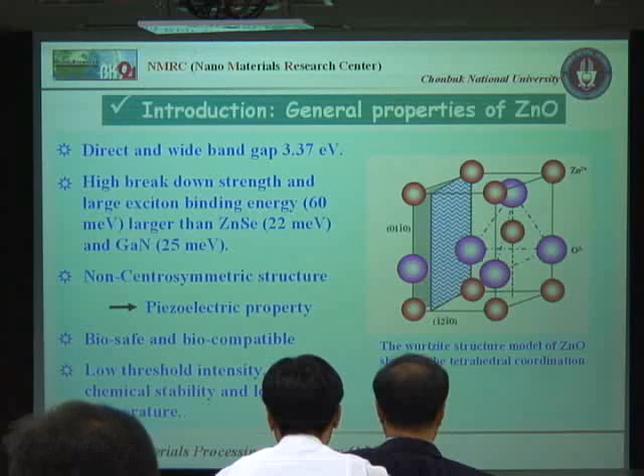Because of these various properties, it also has various applications. It can be used for displays and signals, automotives, and also LEDs and TFTs, SAW devices, varistors. Recently, it shows its versatility in sensors and hydrogen storage. Because of its biocompatibility, it can be used as a biosensor, and it can also be used for chemical sensors and gas sensors, to fabricate FET devices and others.

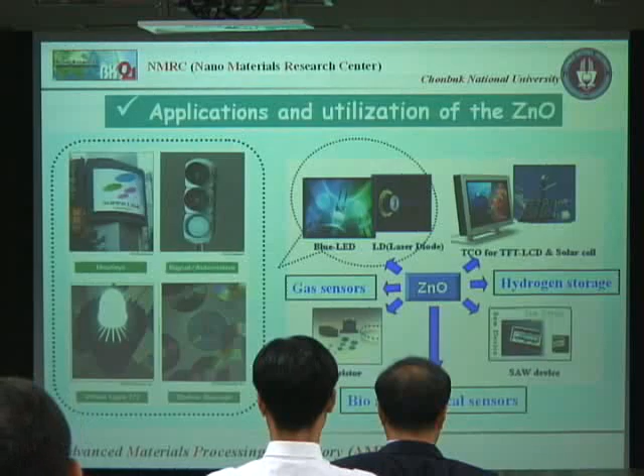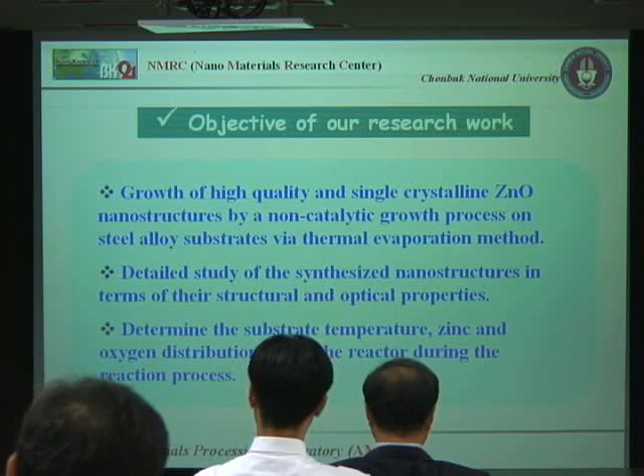The objective of our research work is to grow highly crystalline zinc oxide nanostructures by the non-catalytic growth process on a special substrate, steel alloy, via the thermal evaporation process, and to determine its growth mechanism and the structural and optical properties of these structures, and to determine the substrate temperature, zinc and oxygen concentration during the reaction process inside the reactor. What is the impact of these reaction parameters on the morphology and structure of these nanostructures? We also determine this in this presentation.

Instead of the common substrates, we use a different substrate in the synthesis, the steel alloy. We chose this substrate because of some interesting phenomena. In some cases, this substrate can act as a catalyst, and because of this new substrate, it's very interesting to determine its growth mechanism. The surface morphology of the steel alloy substrate is rough, which provides an excellent interaction between the substrate and the deposited materials. And it is a harder substrate compared to other substrates, with a higher melting point and resistance to acid corrosion.

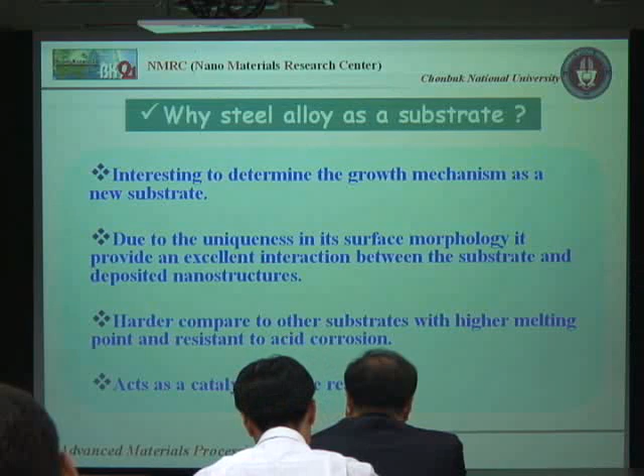This is our schematic diagram for the experimental setup which we use to synthesize our zinc oxide nanostructures. In the middle of our tube furnace, we placed a small quartz boat containing metallic zinc powder, which we used as the source material for zinc. And we placed three substrates, indicated as A, B, and C, beside this quartz boat. During the synthesis, we observed the reaction temperature at each substrate, and found that the temperature was different at each substrate.

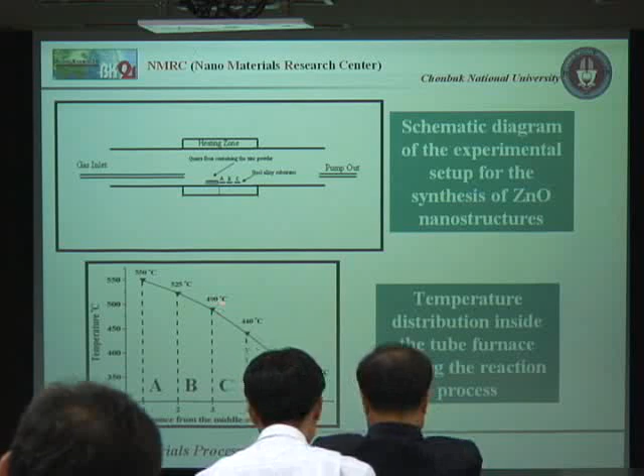At substrate A, the temperature was 550 to 525 degrees centigrade, substrate B lies between 525 and 490 degrees, while substrate C lies between 490 and 440 degrees centigrade. So we got some interesting morphologies on different substrates, depending on the temperature of the substrate.

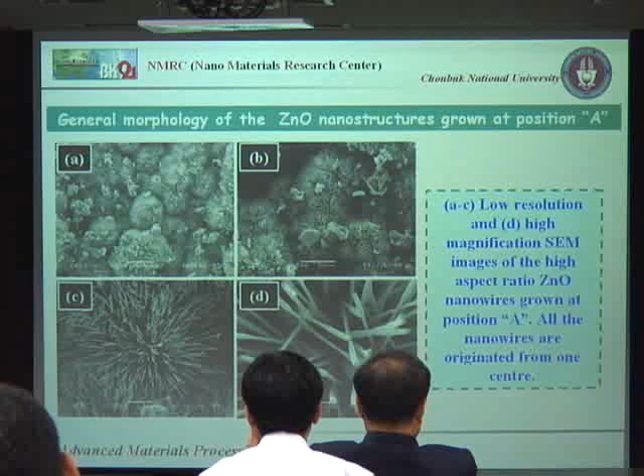At position A, we got urchin-like structures. They contain a high density of zinc oxide nanowires with a high aspect ratio. We can see clearly that these zinc oxide nanowires have well-defined hexagonal facets. It is also very interesting to note that the diameter of these nanowires in the lower portion is lower than the upper. The upper portion diameter increases as we increase the distance between the source and the substrate.

From position B, we got more interesting morphologies: aligned zinc oxide nanonails on the whole substrate surface. We can clearly see that the upper portion of these nanonails shows a perfect hexagonal facet, which is because of the crystal structure of zinc oxide. And these nanonails are grown in very high density, as we can see from the low magnification images.

In addition to these aligned nanonails, we also got, on the upper portion, some coral-like structures made by these nanonails. Maybe thousands of nanonails are together and they make these coral-like structures. We think this coral structure originated because of some thickness on the upper portion of our zinc oxide nanonails, which oxidized and grew in this form.

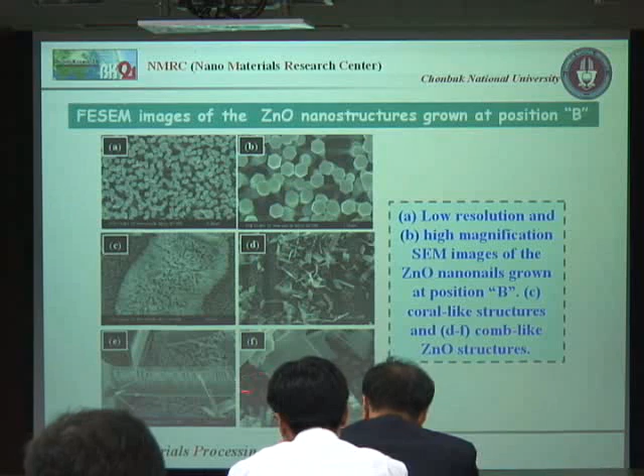In addition to this, at the corner portion of our substrate, we got some zinc oxide nanocombs also. These nanocombs are also made by zinc oxide nanonails. We can see clearly in these pictures that the zinc oxide nanonails are attached in parallel with a zinc oxide nanosheet at one corner and make this comb-like structure.

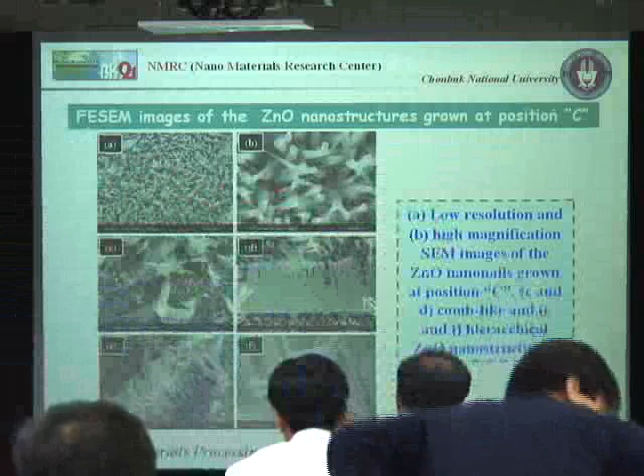At position C, we also got this nail-like structure, but these are, we can say, inverted cone-like structures. These structures also originated in very high density on the whole substrate surface, but the alignment of these nanonails is a little bit poor. They are not fully aligned, but they are partially aligned to the substrate. In addition to these partially aligned zinc oxide inverted nanocones, we also have these comb-like structures on the outer surface of our substrate.

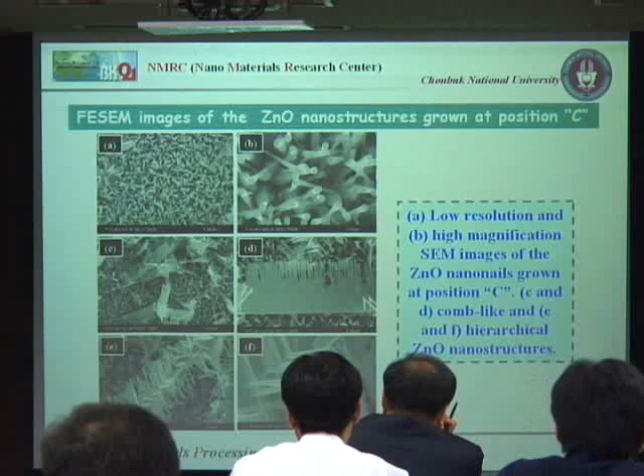Interestingly, we can see that these nanocones have, on one side, not nanocones but zinc oxide nanowires. These nanowires are not uniform, I think because the distance between the substrate surface and the source material is long, so the zinc concentration was not enough to build these nanowires in perfect form. Also, we got some hierarchical zinc oxide nanostructures on this substrate. These hierarchical nanostructures have four-fold symmetry and are made by these zinc oxide inverted nanocones.

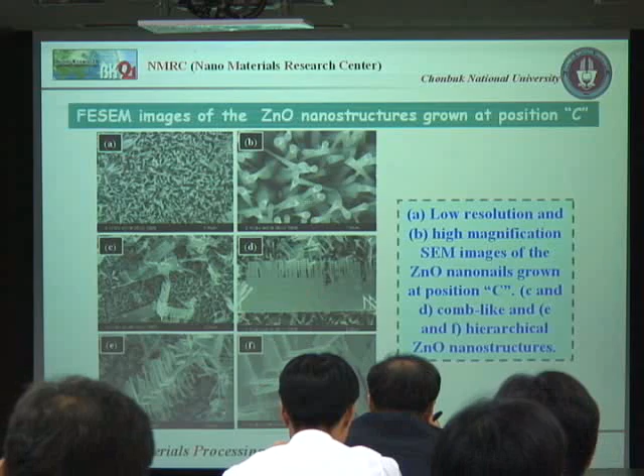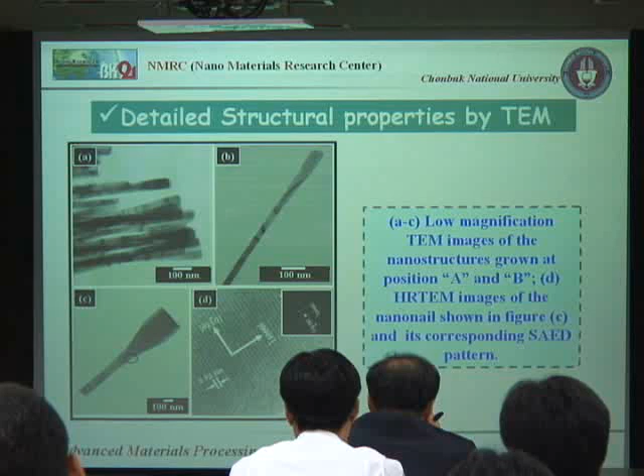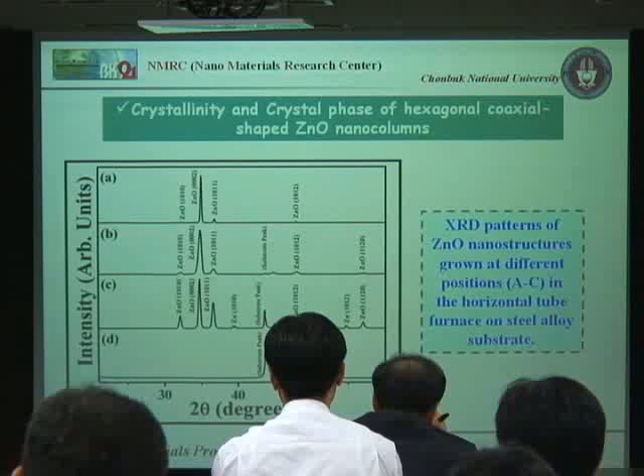We found that these nanonails have grown along the 0001 direction, and have a perfectly hexagonal phase, because the lattice distance between the two fringes is about 0.52 nanometer, which is equal to the lattice constant of zinc oxide. So we can predict that our grown nanostructures are purely hexagonal wurtzite. The crystallinity and crystal phases of our grown nanostructures were observed by XRD pattern, and all the nanostructures are grown along the c-axis direction.

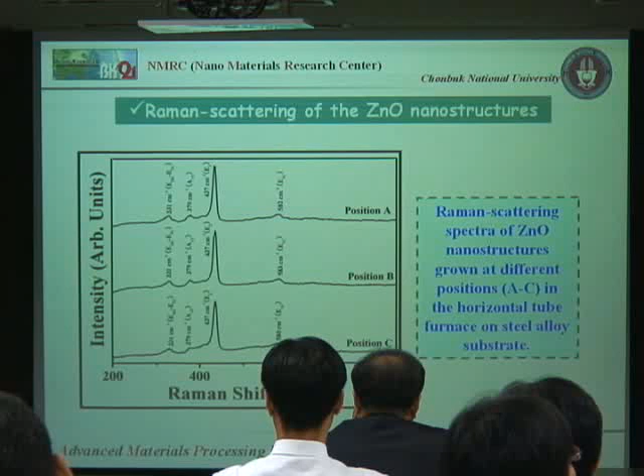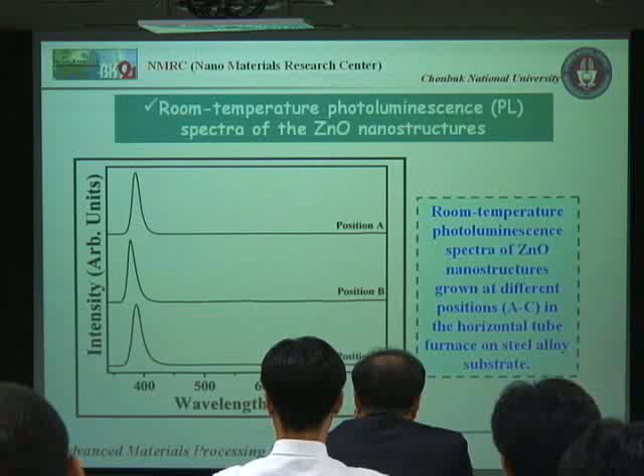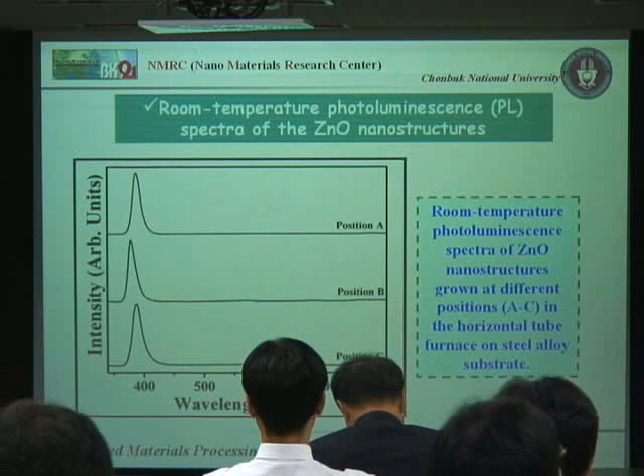In room temperature photoluminescence spectra, we only got a strong and sharp UV emission in all the cases, without any green emission or defect emission. From this spectrum, we can confirm that our grown nanostructures have excellent optical properties and very few structural defects.

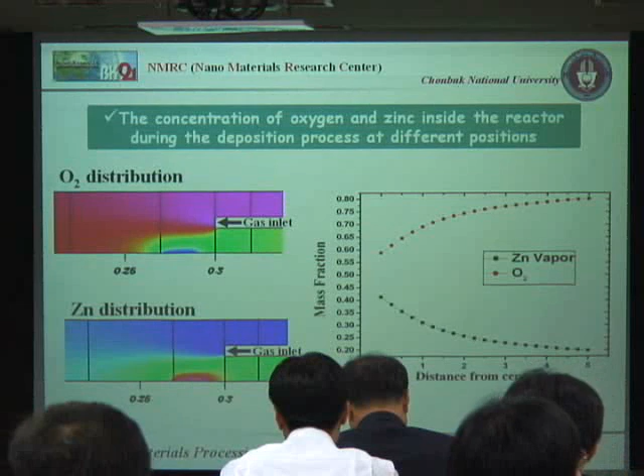To know the concentration of zinc and oxygen inside the reactor during the reaction process, we did some simulation, and found that as the distance between the source material and the substrate increases, the oxygen concentration increases, while the zinc concentration decreases. So we did more experiments to verify whether we get the same results at different oxygen concentrations. We chose 1.5:1, 2:1, and 3:1 oxygen to nitrogen ratios.

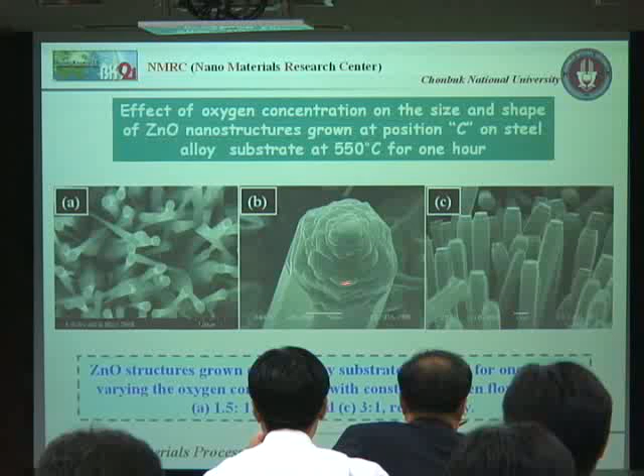At position C, as I described previously, we got inverted nanocone structures in high density. But when we increased the oxygen concentration, we got micro rods on the substrate. These micro rods are grown in very high density, but the structure is transferred from nano to micro. When we further increased the oxygen concentration, keeping the nitrogen concentration constant, at 3:1 we got coaxial shaped zinc oxide nanorods on the whole substrate surface.

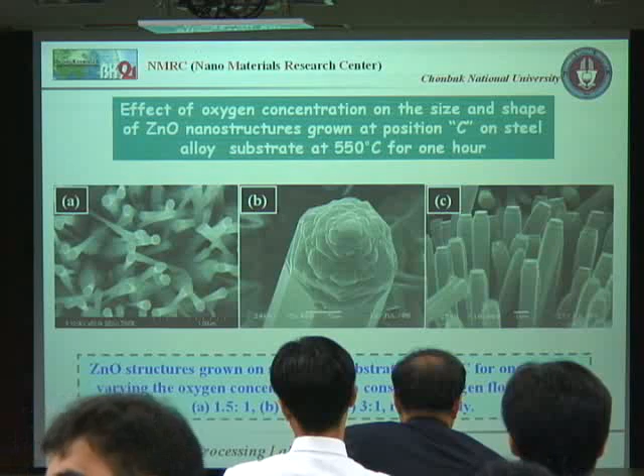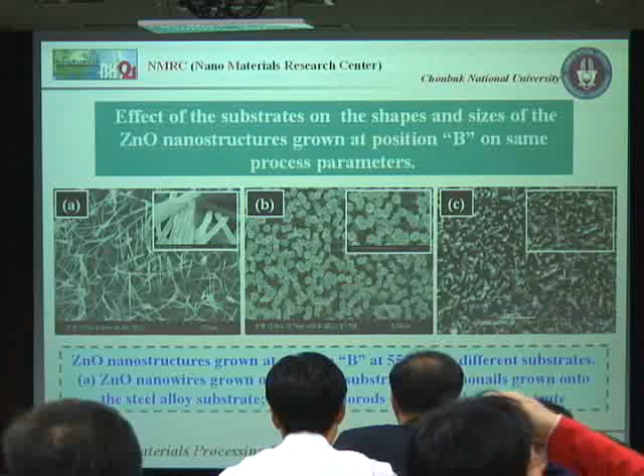Also, to check the substrate effect, we did experiments on different substrates at the same process parameters. On the silicon substrate, we got single crystalline, hexagonal shaped zinc oxide nanowires in high density on the whole substrate surface. These nanowires are not aligned, but their shape is perfectly hexagonal. On the steel substrate, we got nanonails, and on the aluminum substrate, we got aligned nanorods, not nanonails or nanowires, at the same process parameters.

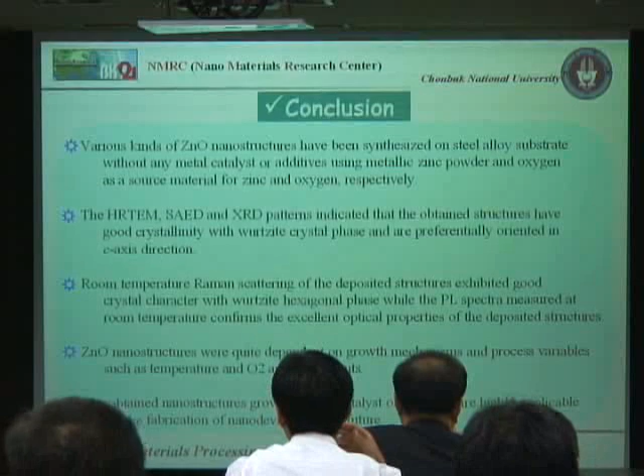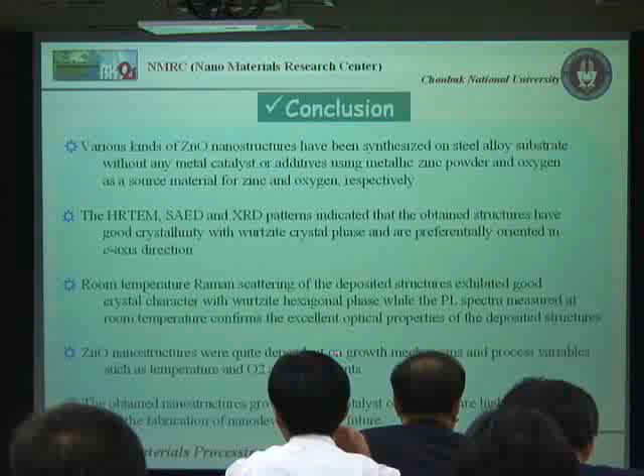In conclusion, we grew various zinc oxide nanostructures on the substrate without the help of any catalyst, just using zinc powder and oxygen gas as the source of zinc and oxygen. The detailed structure characterization indicated that our grown nanostructures are single crystalline with good crystallinity, and they show excellent optical properties. Also, the nanostructures of zinc oxide are quite dependent on process variables such as oxygen and zinc content.